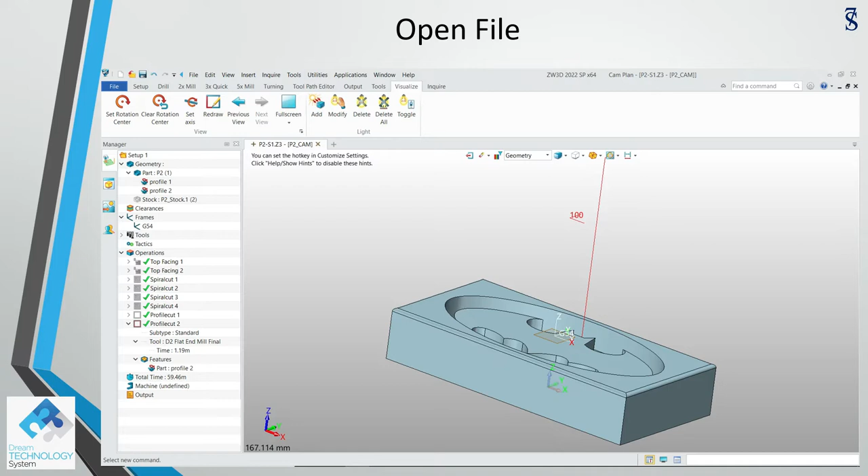This is the result on the previous video. We have completed the outer profile of the Batman logo. We need to use this tool called the concave radius end mill.

Some people call it radius end mill, used to cut the top corner radius. We use the 2-axis mill, corner round, create a profile for these two paths. We need to select C round and click OK.

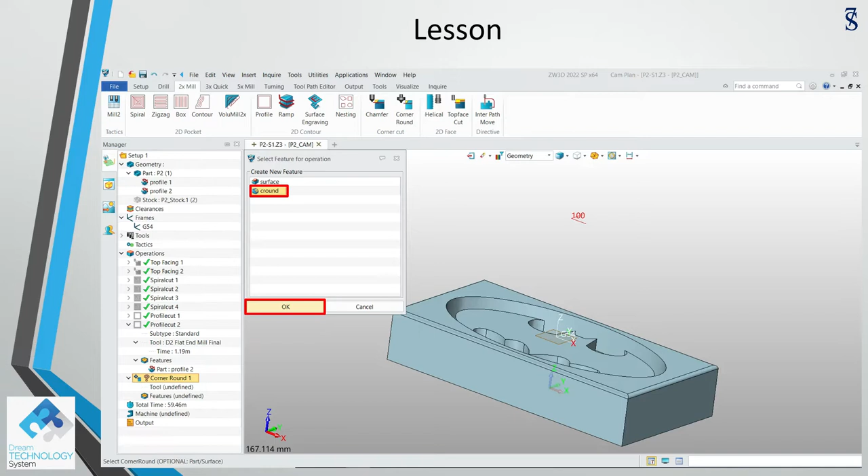The first line we need to click is this one, continue the one at the side. We have to flip the part to select the balance two lines. This is one of it, the third line, and then this fourth line.

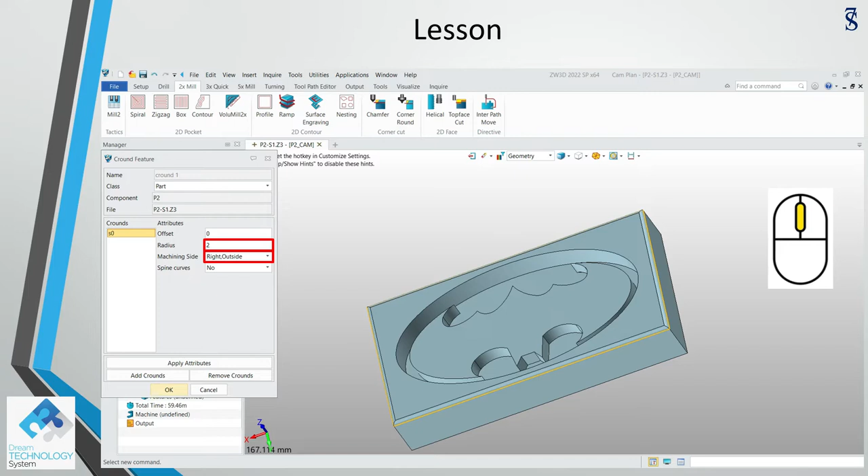Upon selecting all the four lines, we need to use the middle mouse click to show this screen by filling up the radius and the selection of the machining side. After we done that, we have to click OK.

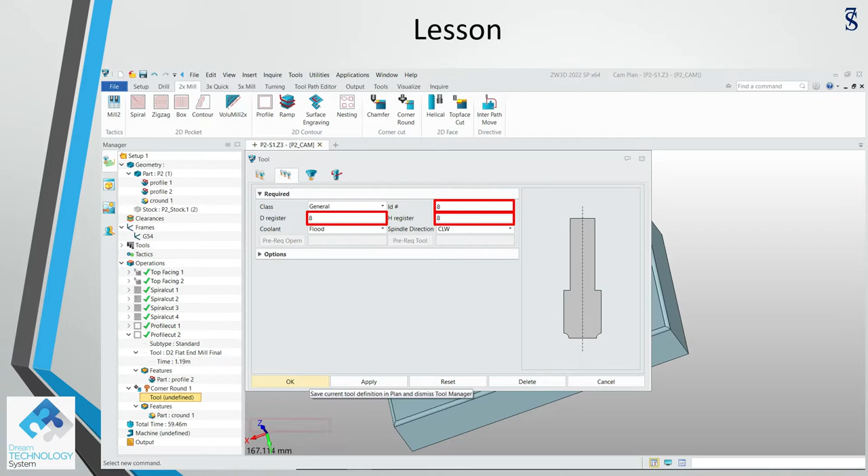This is gonna be the tool that we're gonna cut this part. So I put a name R2 fillet and the dimension of the tool. We select tool number 8 because we already have 7 tools previously. I just put tool 8, easier for us to continue with the lesson. We just click OK upon selecting that.

On the right click of that operation, we need to set the balance parameter by selecting edit, set the G54 frame, RPM and feed rate we need to change. The engage we're going to use a special way. The lead in lead out we're going to use manual. The first lead in is going to be -5 and angle 0.

You can try the rest of the numbers so that you can choose the way best suited for your operation. In other part I'm going to use 5 and 0 for the first lead out, easier, so that you can learn something about this application. Change to a different color, light purple, and continue with calculate.

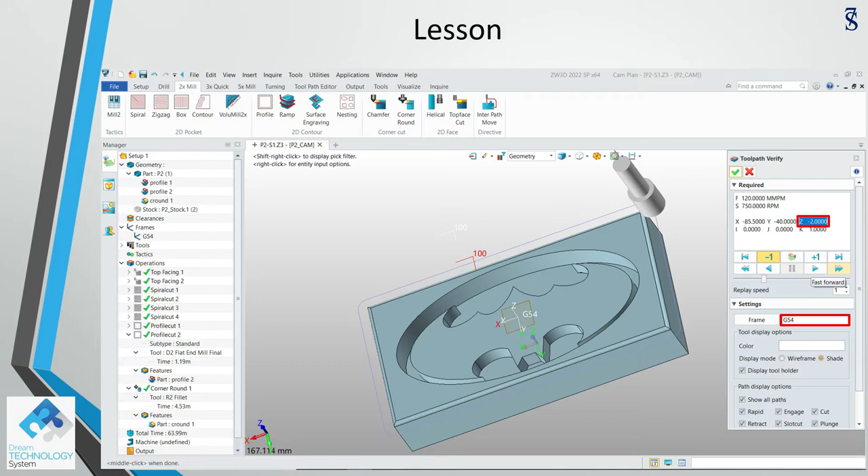We can continue with verification by using the verify and then change the frame to G54. You can see Z -2, which is the correct dimension. We need to go down 2mm to cut the corner radius.

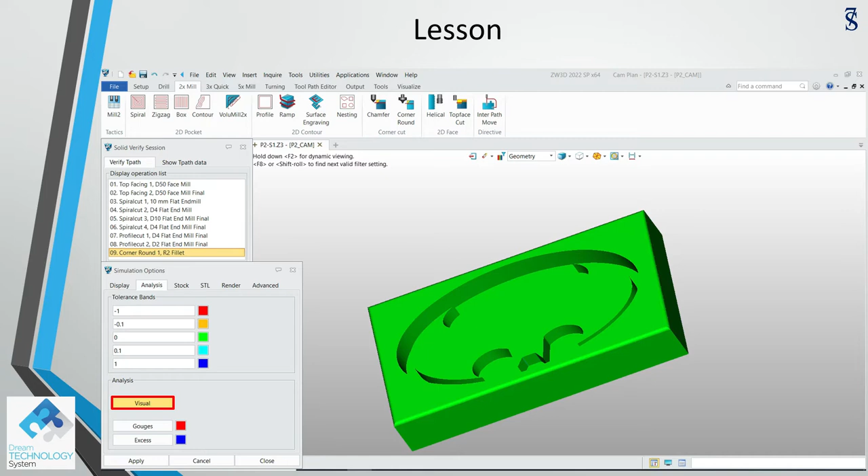After that, we click OK, continue with solid verify, just do a very quick one. You can see that the light purple is formed up. You need to confirm it by using the analysis visual to show the size is correct. So everything looks green, looks good. So we can save this file by selecting the save button.

I have completed the whole operation on this part. So let me show you the last step by step how we complete the corner radius on this part.

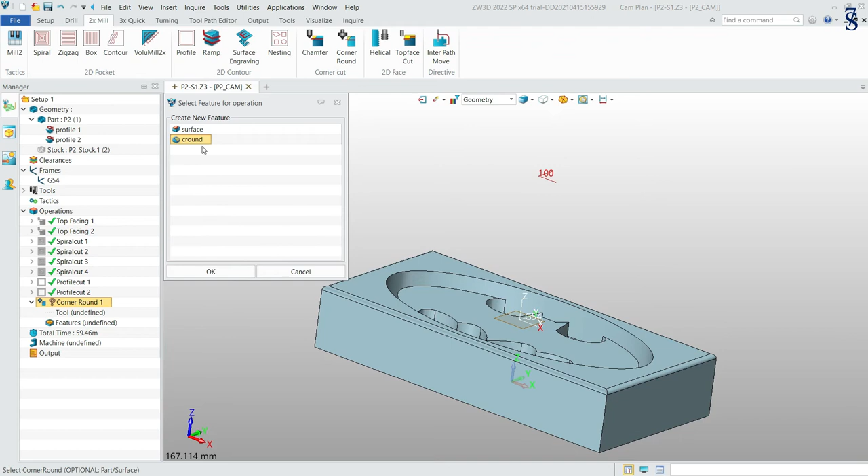Hello, welcome back. Let me show you the step by step how to accomplish the task. We will double click the previous operation, collapse it. We will choose the 2-axis mill with corner round, create the profile, C round, we click OK, choose this line, this line.

We need to flip the part 180 degrees, easier. As you can see, this one and this one. We will click middle mouse to bring out the menu. Dimension is 2. This is right side, correct?

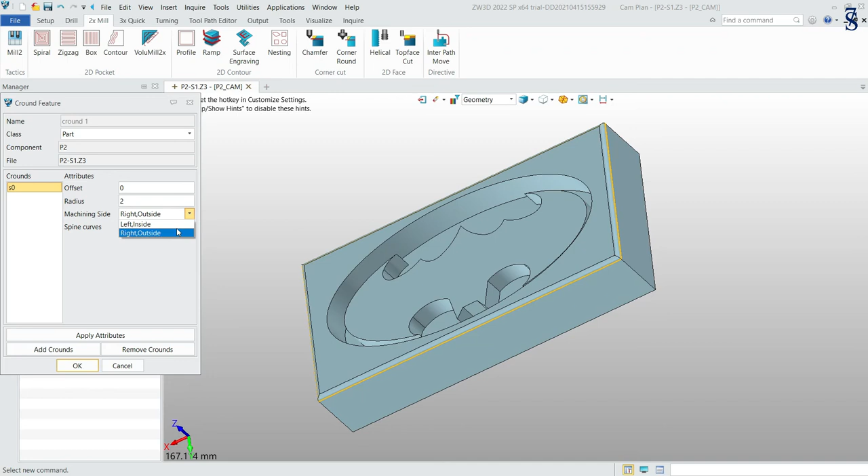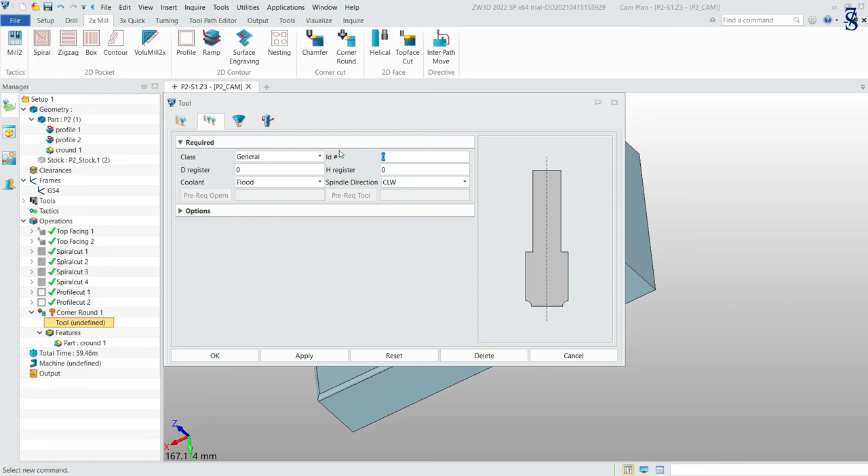So we click OK. The tool name is gonna be R2 fillet. Dimension 15. This is 10. And this is 2. We will put tool number 8. Auto fill up. We click OK.

We are not going to do calculate now. We need to set the frame to G54, RPM 750. The MMPM is going to be 120. The lead mode is going to be manual. The lead in is -5 and 0. The lead out is 5 and 0.

We will change the color to light purple. Perform a calculate. Looking good. Let us do a verify. Set the frame to G54.

1, 2, 3, 4, 5. So you can see that the Z already goes to Z-2, which is correct. We click OK for this and perform a solid verify.

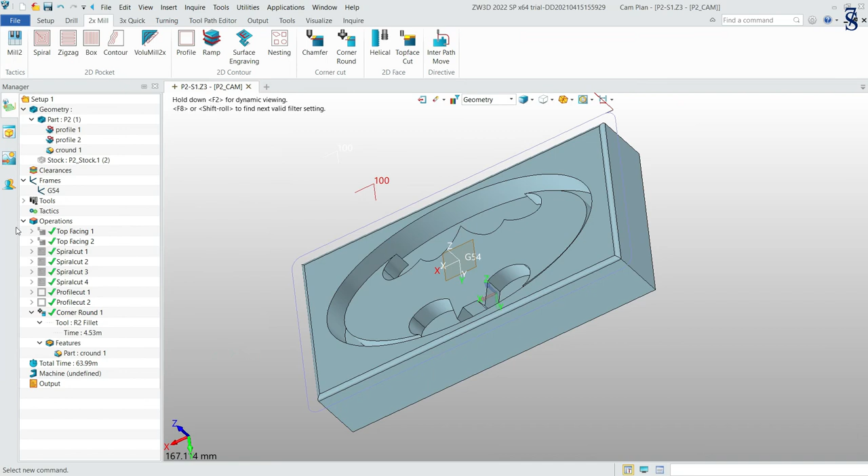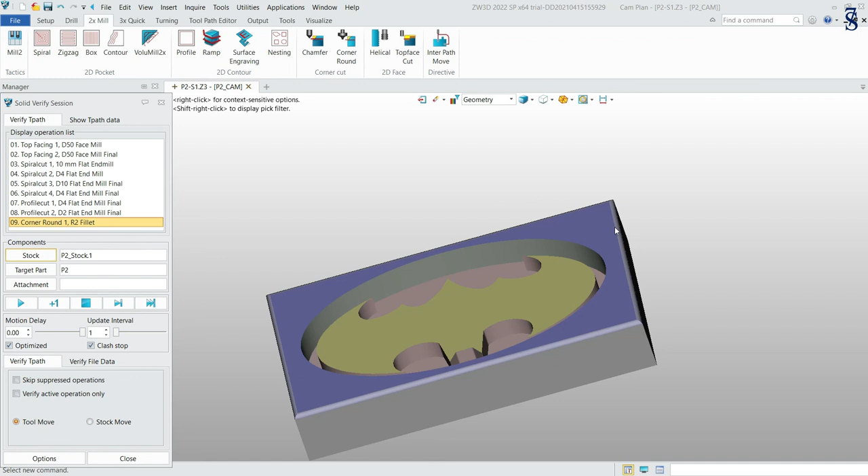Let me flip the part perfectly. So let us perform the cut. You can see all the previous operations include this one. The corner radius is already cut, so let us do an option analysis visual. All the corner is cut perfectly, so that is nice.

We click OK. We save this part. This concludes the whole operation for this part.